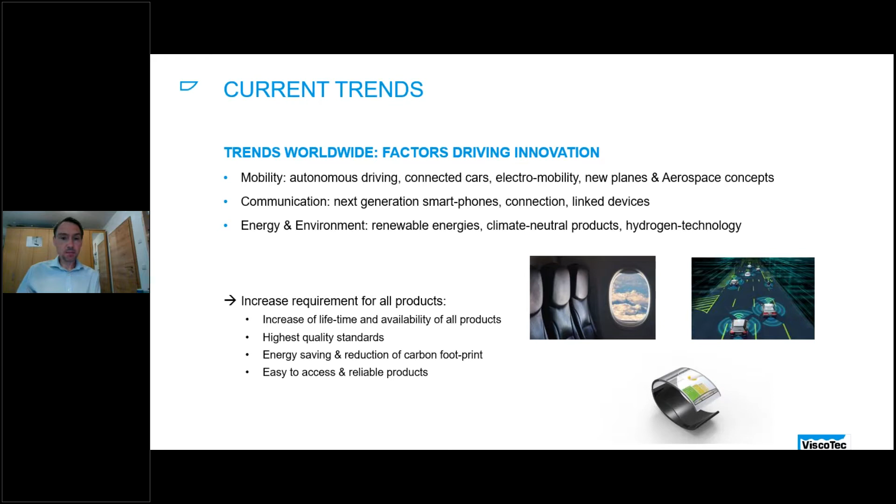What does this mean for manufacturing? There are demanding requirements, and the production processes and raw materials are adapted to these new products, or required products. New materials are used, so the latest R&D developments in case of any raw material or production materials leads to challenging processes and products in manufacturing.

These challenges have to be adapted in your factory or during production. The efficiency has to be increased, as well as the flexibility. Downtimes have to be decreased and the yield has to be increased, as well as the quality and output range. State-of-the-art materials, products and processes have to be introduced.

Looking more in detail at fluid dispensing manufacturing processes, these are tremendously increasing in all production processes. The adhesive bonding process is replacing traditional methods like welding, rivet, or screw connections. Higher flexibility is possible by using adhesives, and also new products are possible by using newly developed materials. Performance, features, quality, product life and reliability are all increasing as well. The dispensing process should be repeatable and very process safe to be a real alternative to the traditional methods like welding or screw connection.

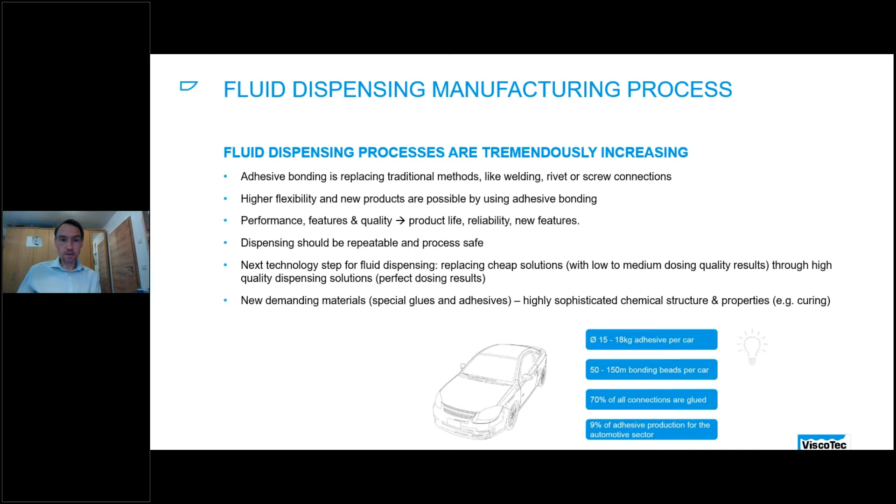This leads to challenges during the dispensing processes as well. Factors influencing the dispensing process include the type of adhesive used, the choice of the correct dispensing system, and very often dispensing systems are also integrated with robots and automation. Of course, the conveying and handling of material is also a very important topic to consider.

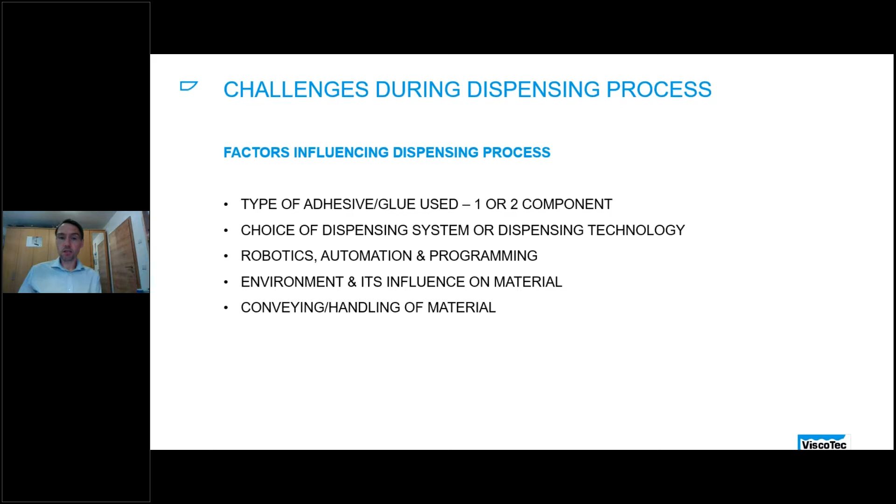What do you need to keep in mind when you deal with adhesives? You have to consider that it's a chemistry, a liquid. So you have to consider the rheology of the liquid, typical features like reaction time and curing time, but also topics like high flammability risks, abrasive particles, and thixotropic behavior. A faulty design or choice of dispensing system often leads to production delays, quality rejections, and increased scrap, waste and losses. Typical errors are that the parameters needed for dispensing are not clearly defined, layout is not taken seriously, and there's wrong consideration of hoses or equipment.

How is an effective dispensing system designed? First of all, it's very important to look at the handling of the material. Are there any requirements for circulation, agitation, degassing, or pre-treatment of the material? The next step is the choice of dispensing technology. There are many different dispensing technologies available, from very simple ones to highly sophisticated ones. You have to consider the required accuracy and precision, as well as other requirements like flow rate, dispensing type, and the pressure situation within the system.

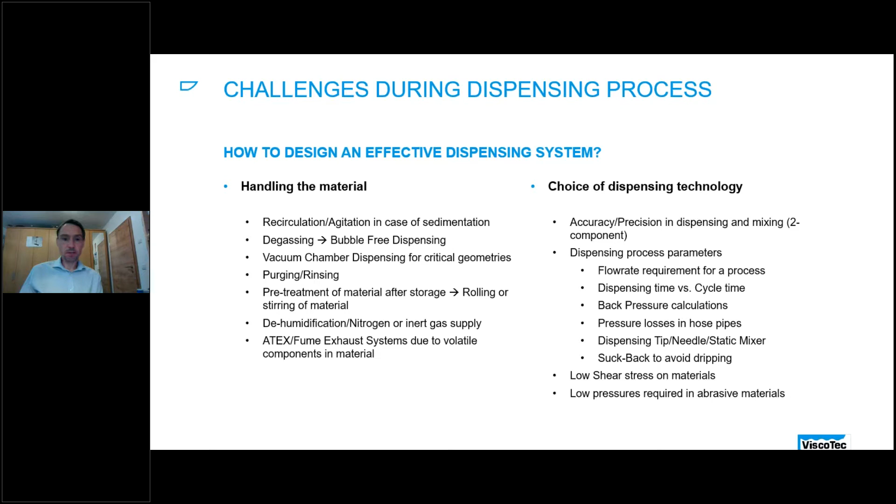There are also challenges with newly developed materials and adhesives. Nowadays, really high viscosity pastes and liquids are available, as well as phase-changing materials. This phase-changing material is a mixture of a liquid and a solid material which changes its phase at a certain temperature. For thermal management applications, highly filled materials are needed or have been developed, but my colleague Johannes will explain more details on these materials later. Combined curing materials are also highly sophisticated, for example with multiple curing methods like UV or heat curing. And of course, chemically aggressive liquids are also included in adhesives, which needs to be considered.

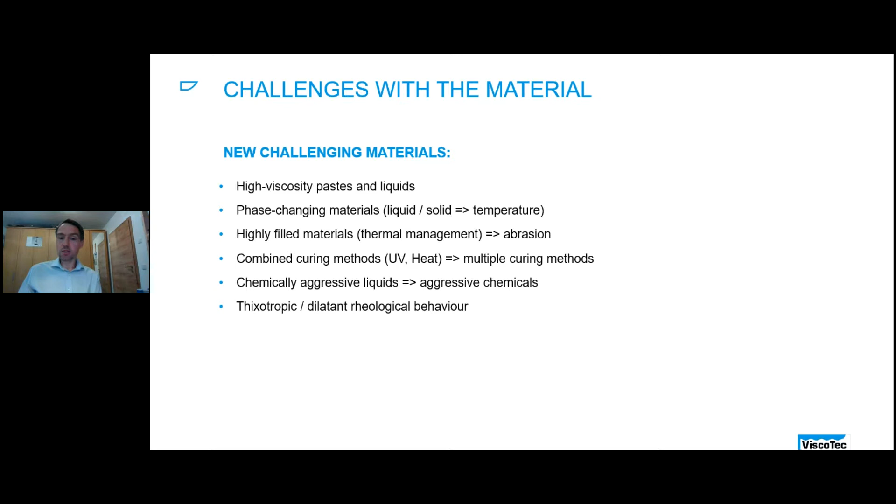Okay, as mentioned, I'll give you a brief introduction of Viscotec, and we start with a video where we can give you some insights into Viscotec.

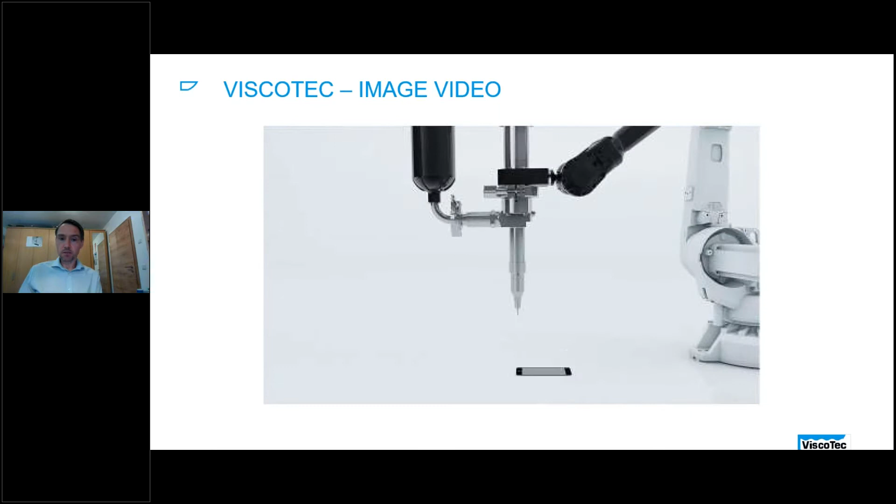As you can see here, we're starting from a satellite. Viscotec develops highly sophisticated solutions for satellites, cars, mobile phones, and all kinds of electronics. You can see here a typical application for electronics display bonding with a typical Viscotec dispenser.

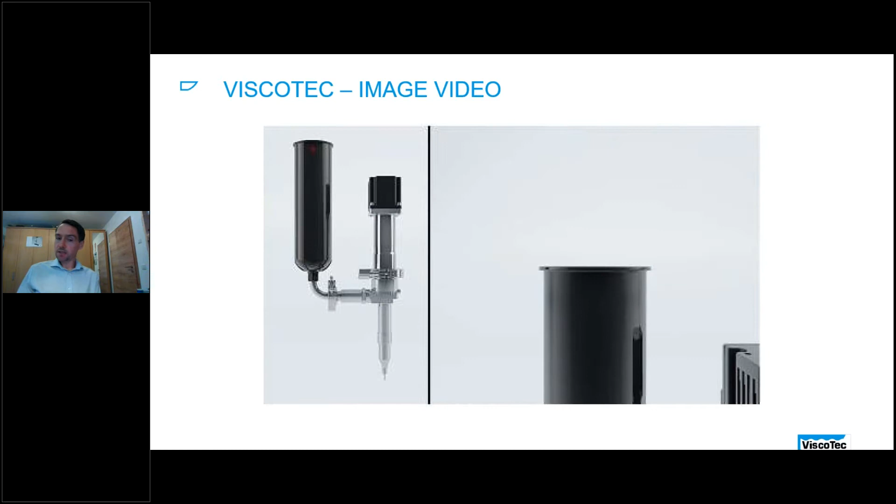This simple dispensing system of Viscotec looks like this. You have a cartridge feeding, a dispenser, and the connection by an electric motor. Gentle handling is guaranteed. The material feeding is done in this case by the cartridge, which will be fed into the dispenser itself.

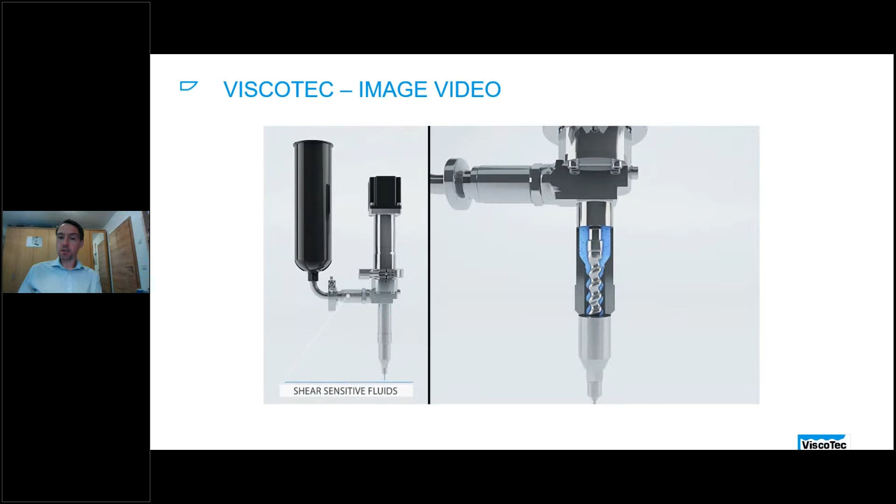So you have a continuous flow rate, and we are using the technology of the endless piston, which means rotor and stator, and this provides the exact dosing amount of the application.

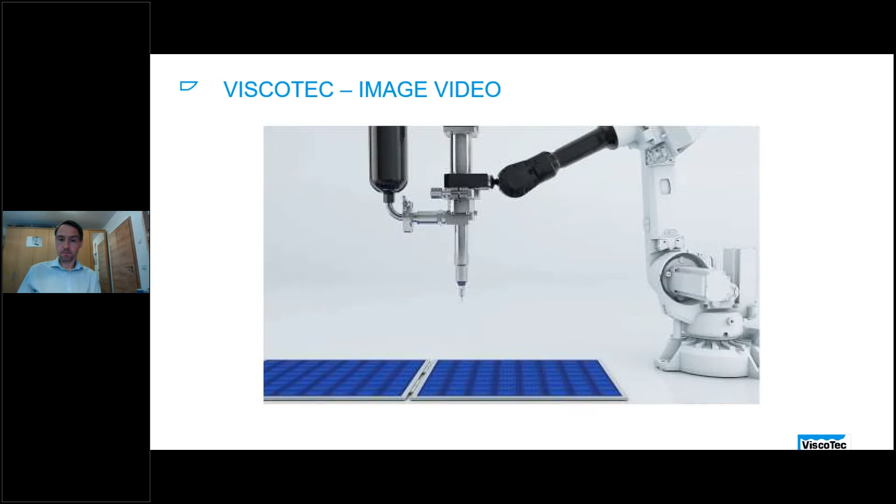Okay, here you can see a typical application mounted on a robot, doing sealing beads on a housing electrical part of automotive. Next example here is for photovoltaic application.

Okay, then I come to Viscotec in general. As mentioned, we are a German-based company with our headquarters close to Munich, so all the production is done in Germany. We have subsidiaries worldwide to provide technical service and sales assistance in India, China, Singapore, France, and the US.

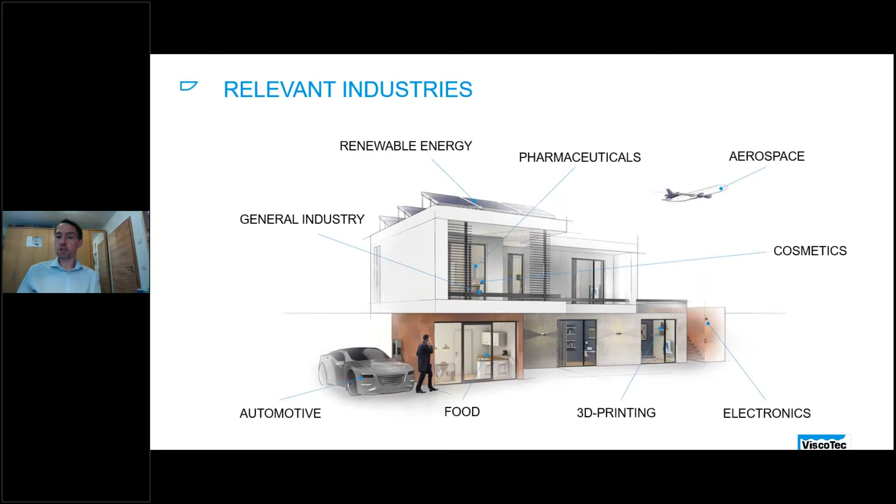When it comes to fluid dispensing, independent of whether it's an adhesive or another liquid, our systems could be used - for example, for renewable energies, pharmaceuticals, aerospace, cosmetics, electronics, 3D printing, food, automotive, or general applications.

As mentioned, we are handling very different materials. In the adhesive sector, we have 1 and 2 component adhesives, UV curing, RTV silicones, epoxy, PUs, silicones - many different types.

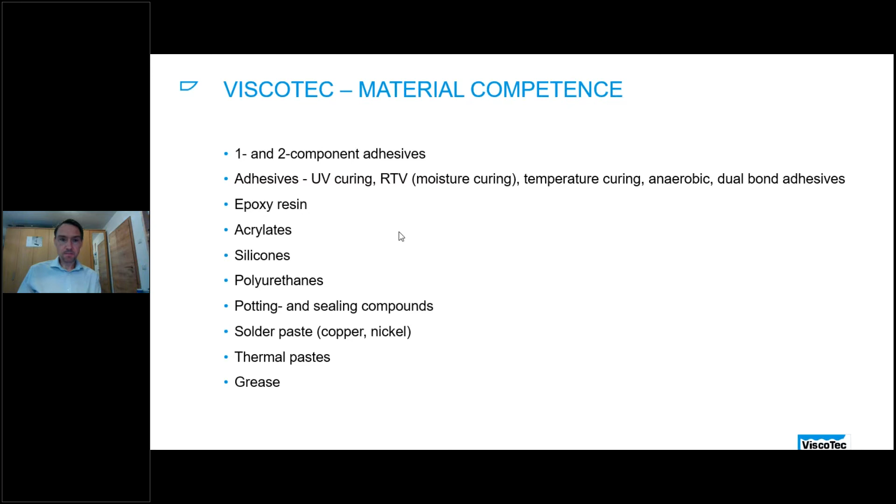What is important here are our brand values. As mentioned, Viscotec stands for precision. Highest precision is really our aspiration and that of our customers. We are providing reliable products, which stands for process reliability. The technology we use is the endless piston technology, and this is the basis for our high quality products. This leads to high quality products, and the quality of our products is reflected in results that impress with their precision. All products I mentioned are made in Germany.

It's driven electrically by a servo motor and is very easy to operate. By controlling the speed of this stator and rotor, you have a defined output, and therefore you can adjust the flow rate as required.

This technology allows pulsation-free dosing, can handle very high viscous liquids up to 7 million CPS, is a valveless technology because this complete system is tight, and offers 99% repeat accuracy.

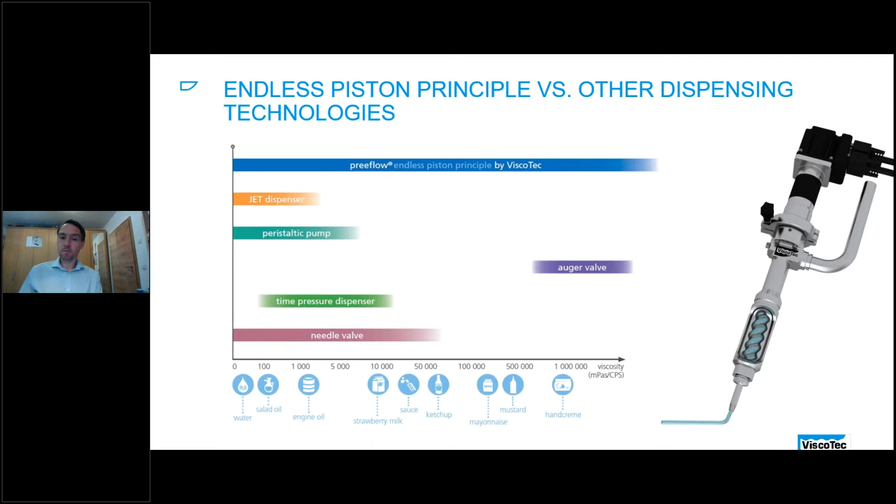Okay, next topic is Viscotec Solutions. We are in general offering modular systems. We have system groups for emptying systems, preparation and treatment, and dosing systems, and we develop these systems according to your specific requirements.

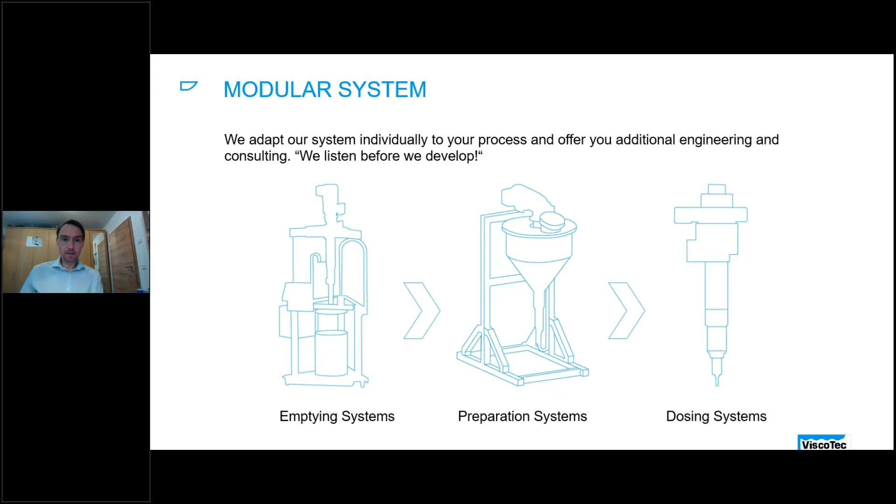The group of emptying systems we can offer starts from small bins, from cartridges, up to very high content barrels up to 1000 liters, or typically the 200 liter pails.

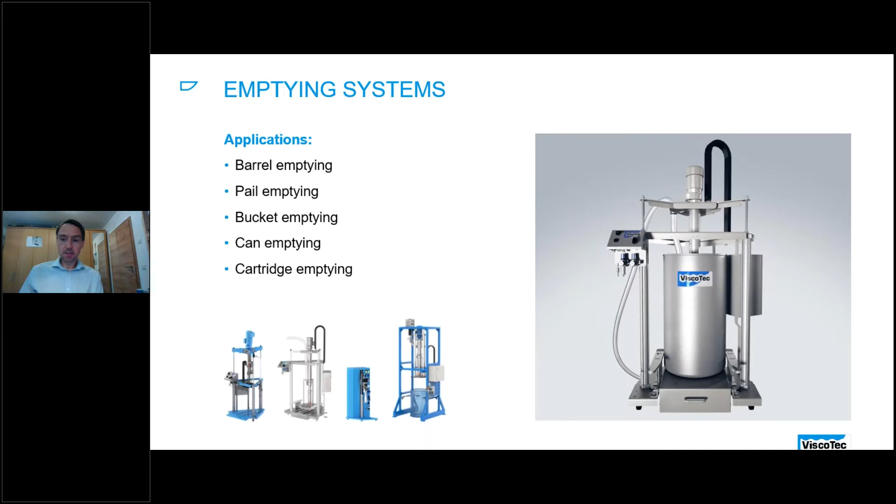And I mentioned we have treatment systems - special systems for materials which need treatment like degassing, circulation, or agitation.

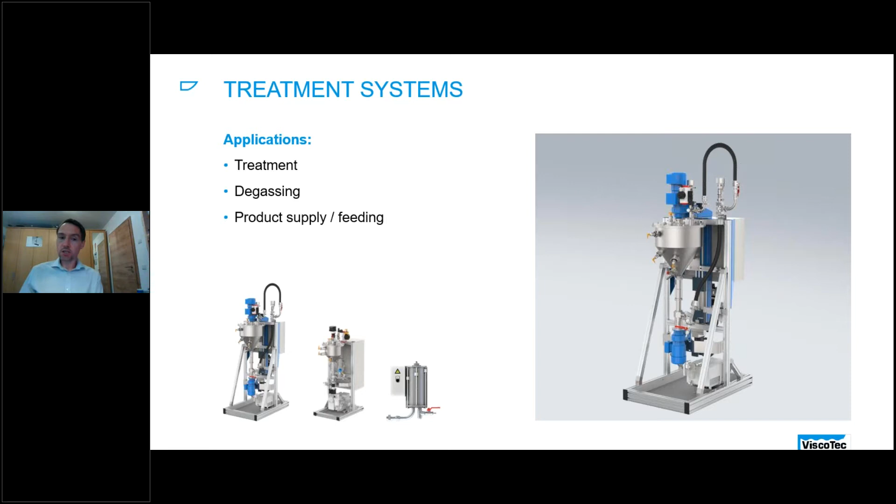This is a typical layout of a 1-component dosing system. On the left, you can see this ViscoMT-XS - it's a pail emptying system for feeding. We have a hose connection, a pressure sensor, and the typical RD dispenser, which uses our endless piston technology.

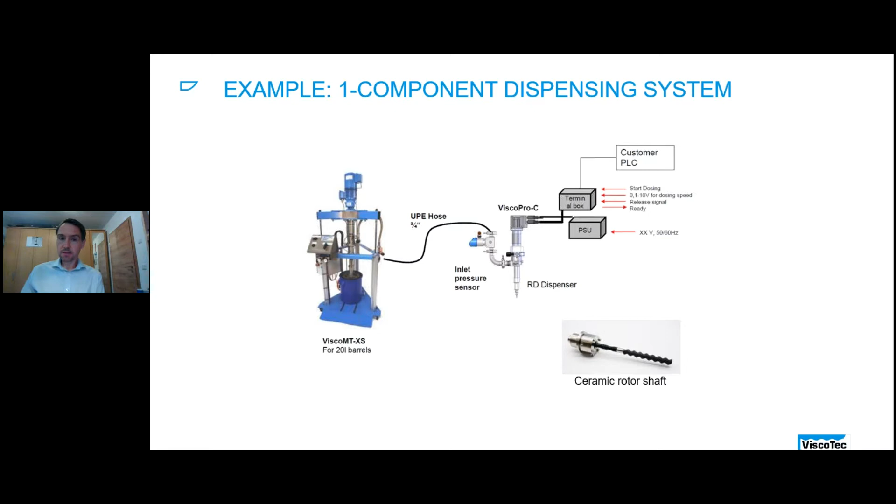The big advantage is that we have the mixed material for these 2-component parts only in the static mixer, which is a consumable. So we have no mixed material in the part, which allows really no cleaning or additional efforts.

Okay, now I present you some challenging applications or solutions we had so far.

In general, when we have liquid dispensing projects and develop a solution for your needs and requirements, we work together with you as the end customer. The end customer defines specific requirements and expects a perfect solution. At the beginning, the material manufacturer of the adhesive also comes into the field because they have all the details with the specific liquids, and they are the specialist on this.

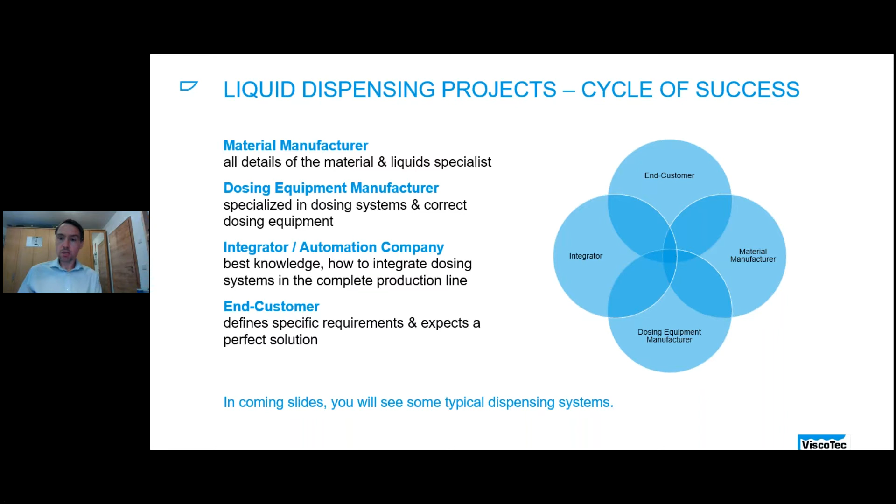The next party is the integrator / automation company. They do the complete integration with robotics, handling, and also integrate the dispensing equipment. The last party is the dosing equipment manufacturer, like ViscoTec. We are the specialists for really the dosing application itself. So at the end, all four parties define and develop the perfect solution for this application.

To give you some examples of difficult projects, this is an example of an air curing dry lubricant. This is a very special material for some throttle valves, as you can see here on top. This lubricant contains solvents and non-mixable particles like graphite.

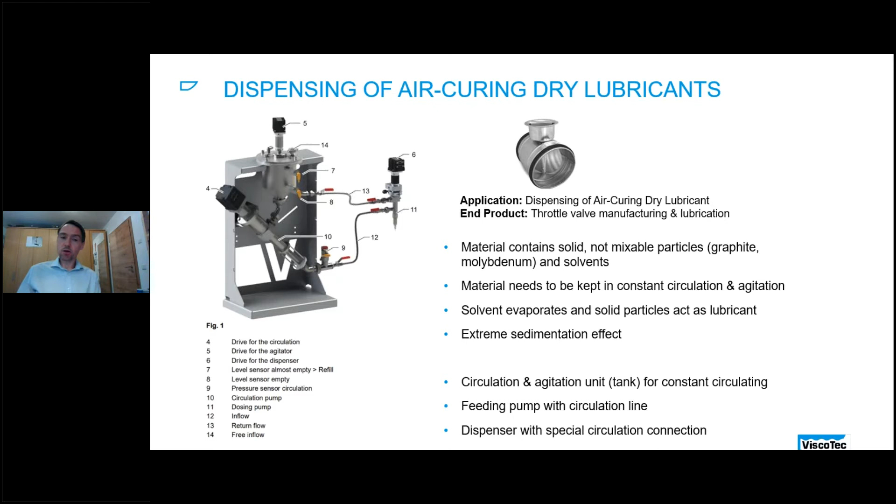It's very difficult to handle this material because it has an extreme sedimentation effect, so we have to keep this material always in a circulation loop to avoid settling and the dispensing being blocked. We considered a special dispenser with circulation, a feeding pump, and a tank where the material is fed at the beginning, and it's always kept in circulation.

Here you can see again the system, and it was a completely customized and engineered solution. Of course, it was necessary to do some tests in advance to confirm the feasibility of the process and materials.

This example of a challenging application was optical bonding. As mentioned, our systems are very often used for display bonding applications. Worldwide, there is an increasing demand for smartphones, computers, and touch screens in general.

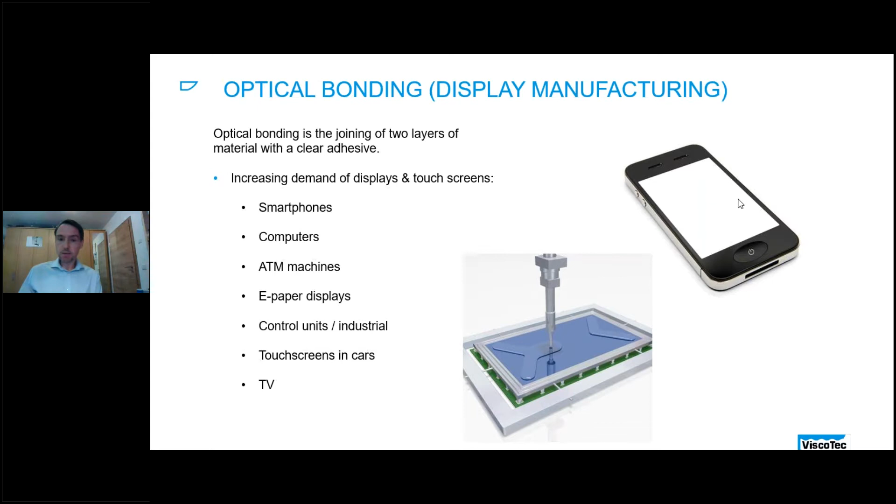To manufacture this display bonding, we typically have two emptying or preparation systems like the degassing. As you can imagine, it's a translucent two-component silicone, so it's very critical to have no air bubbles. All air bubbles have to be removed by our degassing units for component A and B. Of course, highest requirements were needed for accuracy and mixing ratio, and it's a fully automated solution with one of our two-component systems.

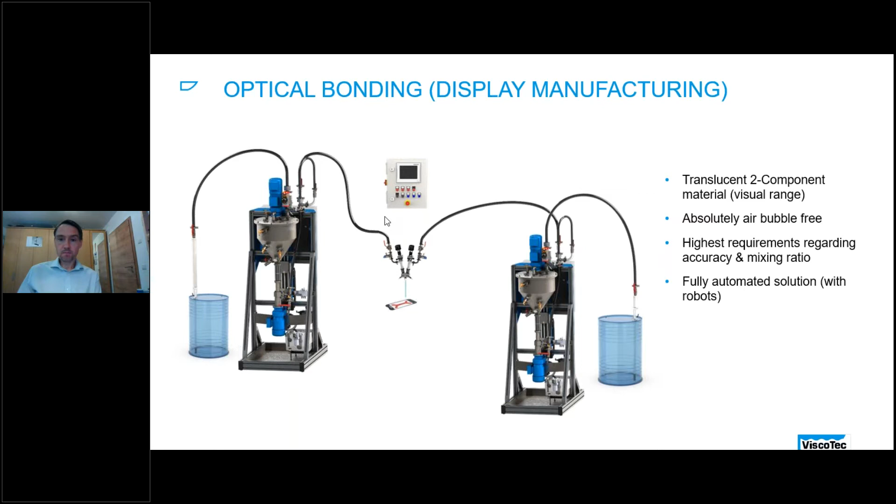This example is again a one-component system, but it was completely heated. As you can see, it's fed by a pail, but then we used heated hoses with a heated pressure sensor and heated dispenser. All this heating is done electrically because we had to handle this heated material.

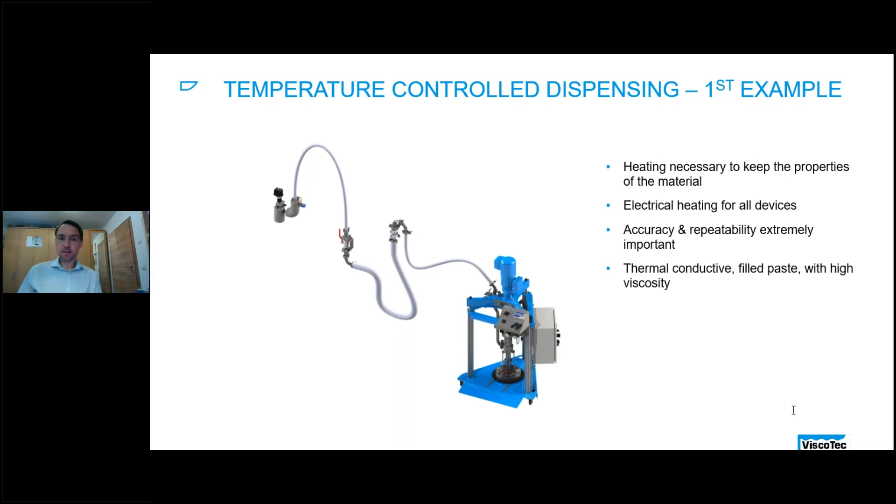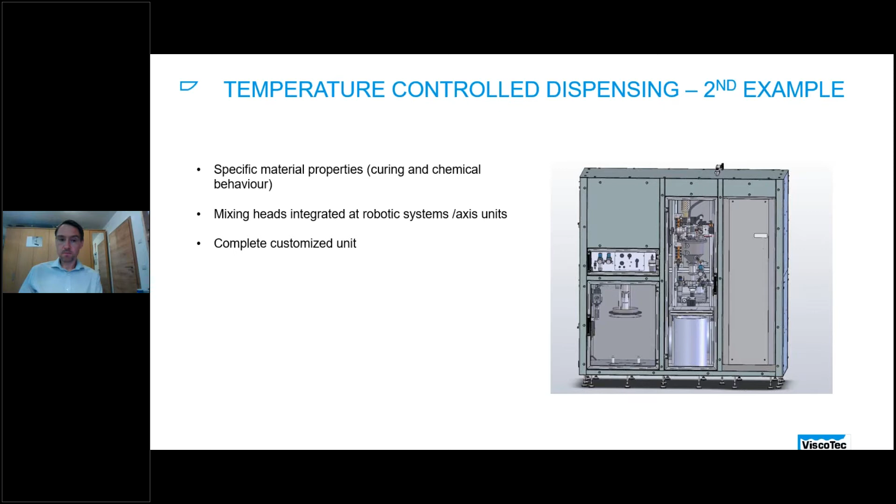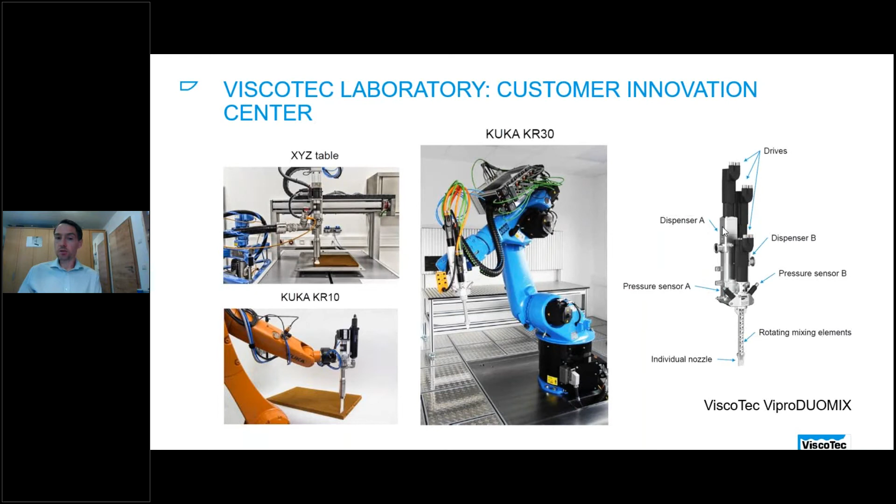This is some Viscotec laboratory footage. I mentioned we do some tests with our systems in the laboratory, normally before each project starts, for new processes together with you as a customer and for new materials.

And here's the Viscotec Customer Innovation Center. It's a new building we have with several laboratories to perform these tests in advance and to define and confirm the feasibility of the application. Now I hand over to my colleague Johannes, who will give you insight into special applications: e-mobility and aerospace.

Thank you very much, Wolfgang, for the nice introduction of the first part of the presentation. Now I would like to continue, as mentioned, with the business development units, e-mobility and aerospace.

Today's focus is on typical dispensing applications with very challenging material properties. Next slide, please.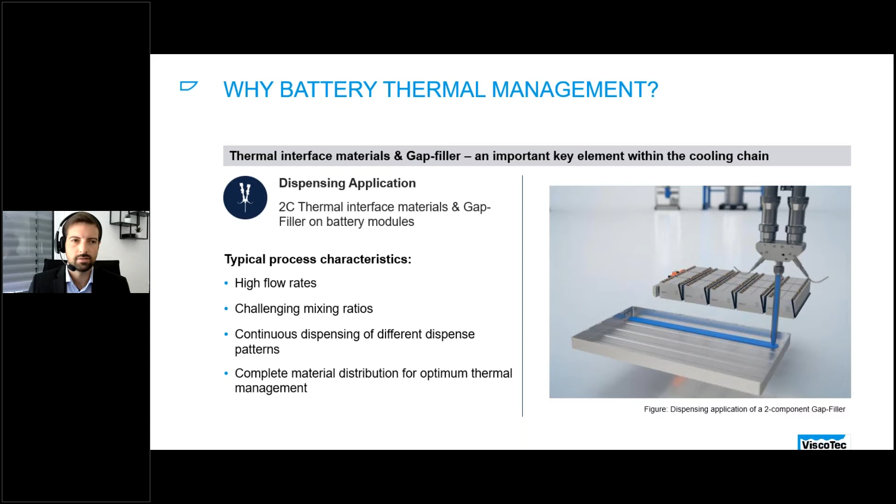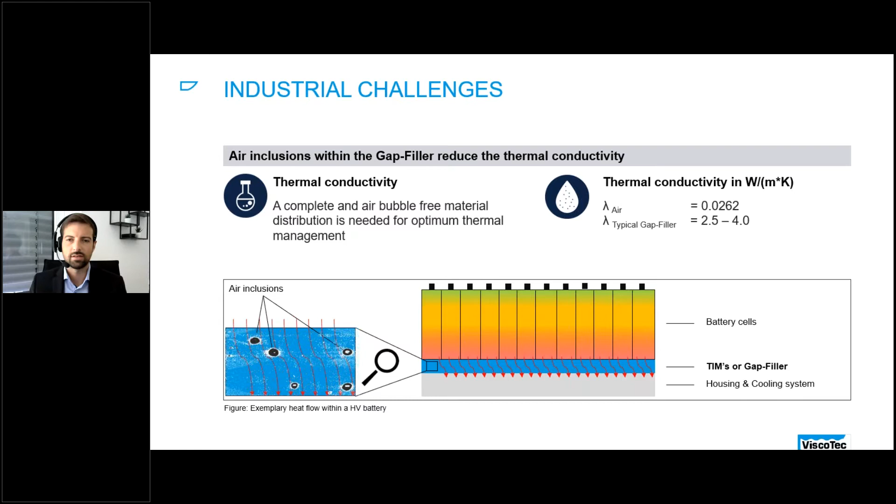The next slide, please. I would like to present our ViscoTec solution for all these challenges and for this application type. Next slide, please. And please start the video.

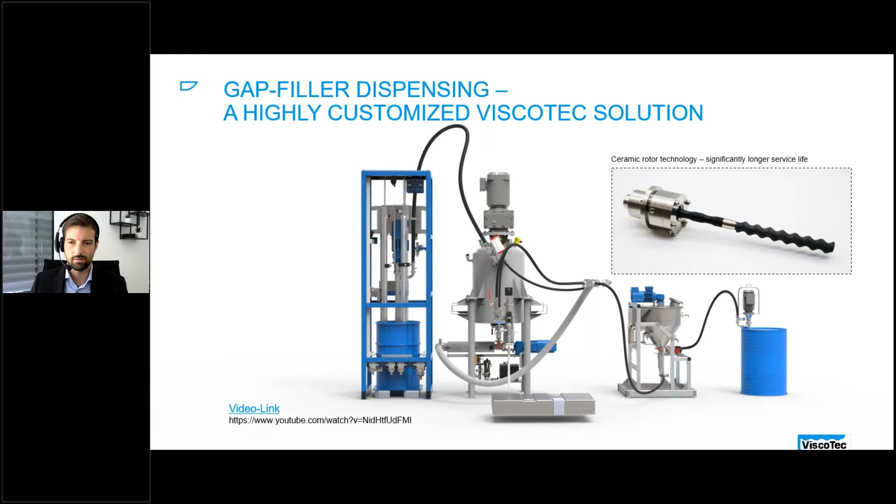So this is a two-component dispensing system for gap filler applications in the e-mobility industry.

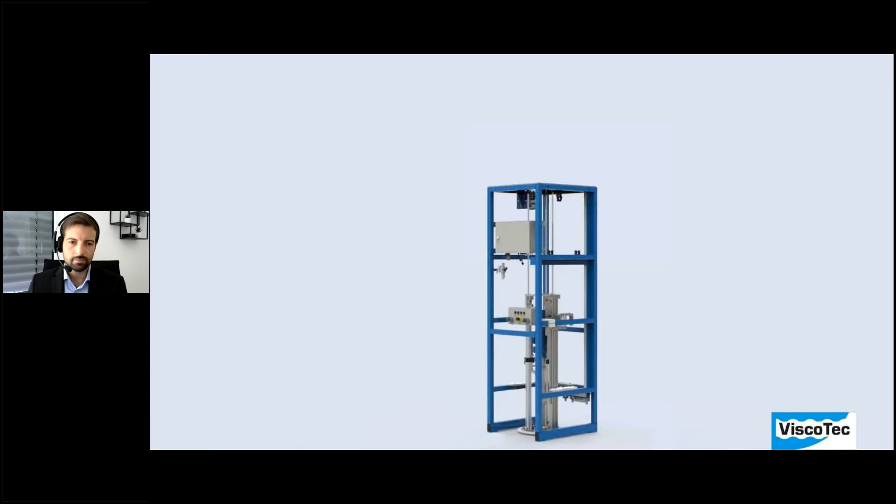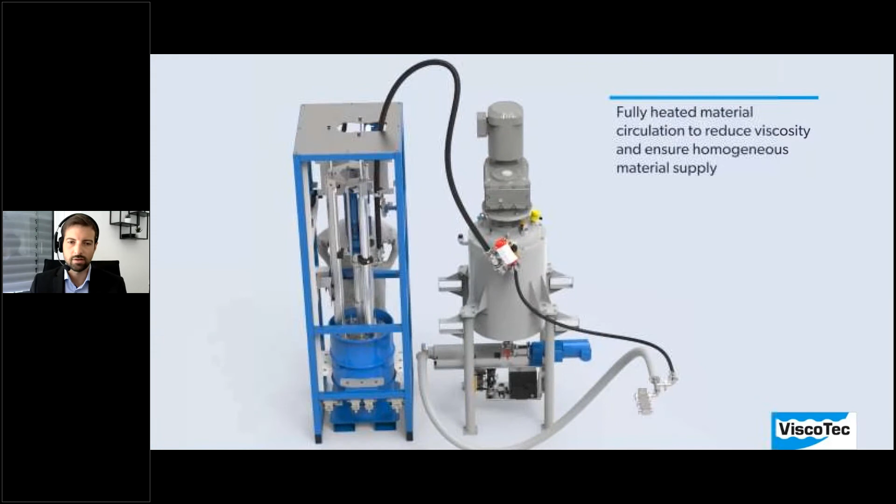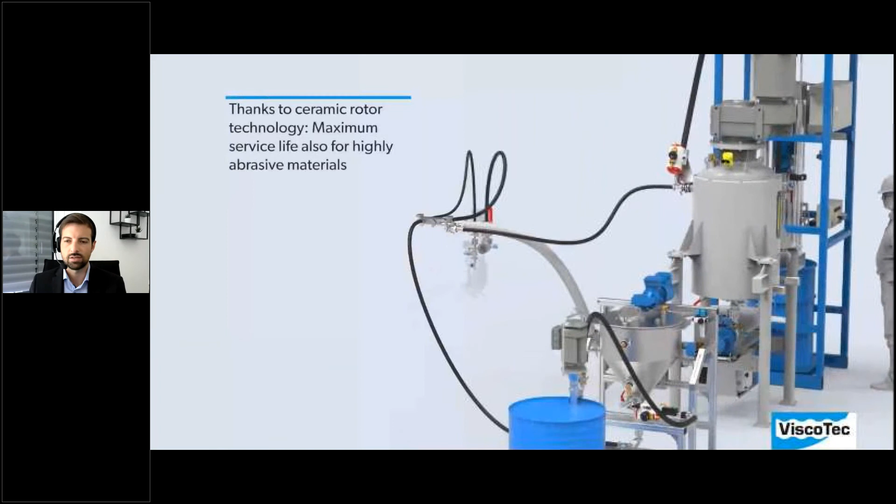Depending on material consumption, typically for the base component a 200-liter barrel emptying system is used, as you can see here. It is connected to a material preparation system and degassing system, including agitators to avoid sedimentation and eliminate air inclusions. Optionally it can be fully heated and circulated to avoid sedimentation within the pipes. On the other side, for the hardener component, we use a barrel pump emptying system connected to a Viscotreat preparation system, to buffer the material and avoid sedimentation for the hardener component as well.

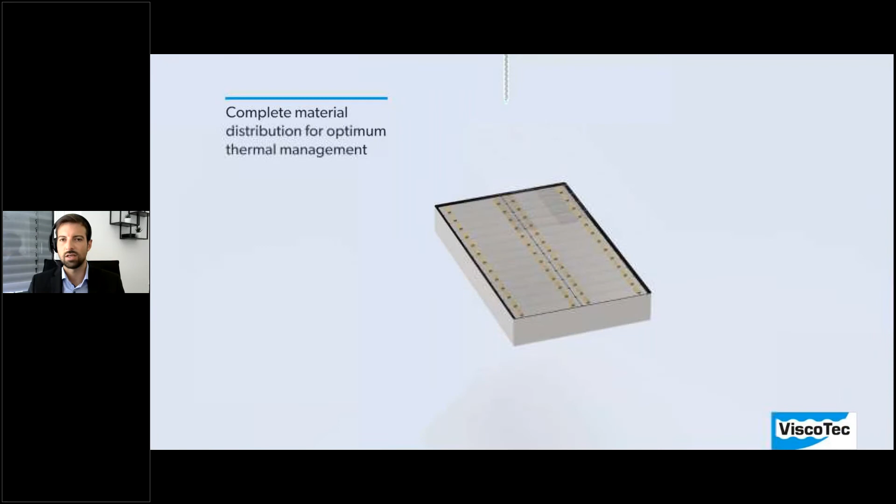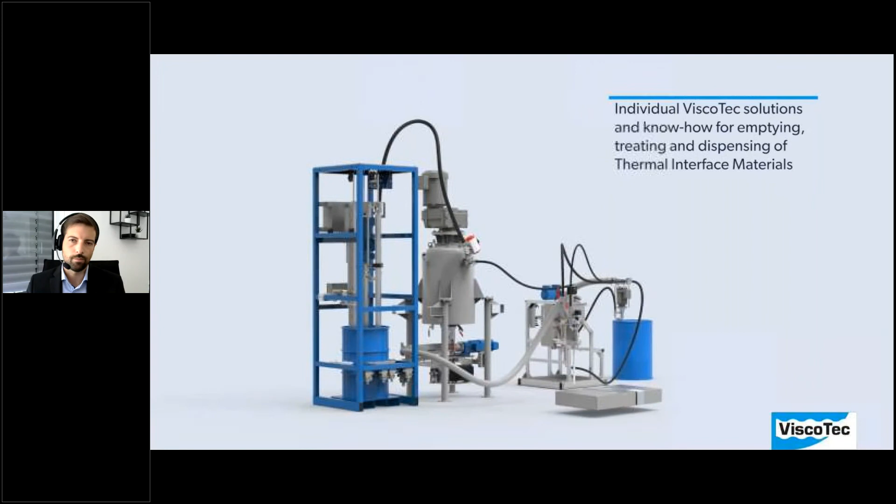Usually both preparation systems are connected to the two-component dispensing system itself. We react to different mixing ratios with different pump sizes, and in this case only component A has to be heated to reduce viscosity and enable better mixing quality. The final result is a complete material distribution under the battery modules to enable perfect thermal conductivity, so a perfect heat dissipation from A to B.

This system is a highly customized solution, but it's also used at different OEMs worldwide. Another feature here is the ceramic rotor technology. As mentioned, these materials are highly abrasive, and compared to our standard rotor, which is stainless steel, we can implement a ceramic rotor to significantly increase the service life of our equipment.

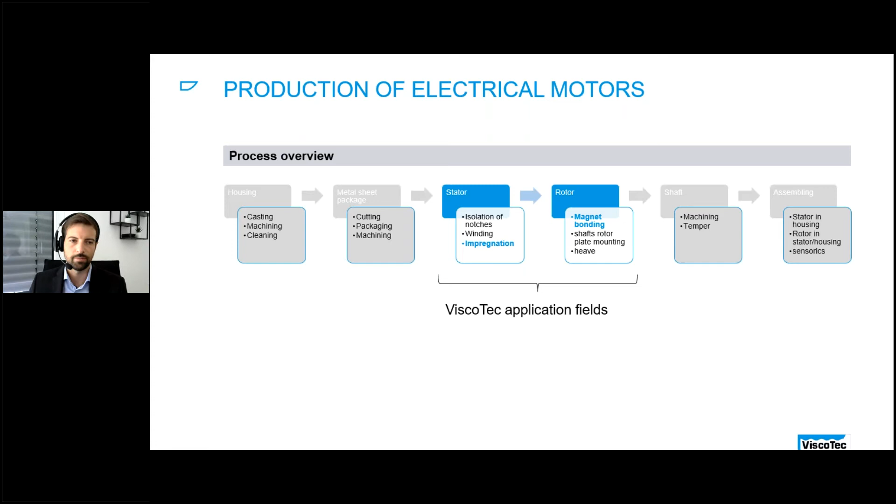So what is resin impregnation and why is it necessarily needed? Electric motors, especially in vehicles, must meet extreme demands—environmental influences and mechanical impacts. They must withstand rough environmental influences like moisture or dust, and mechanical impacts such as shocks and vibrations. Also, in the case of high electrical stress, the motor is exposed to high temperatures. To avoid such failures, the stator or rotor windings are impregnated with resin, and this is also an application for Viscotec.

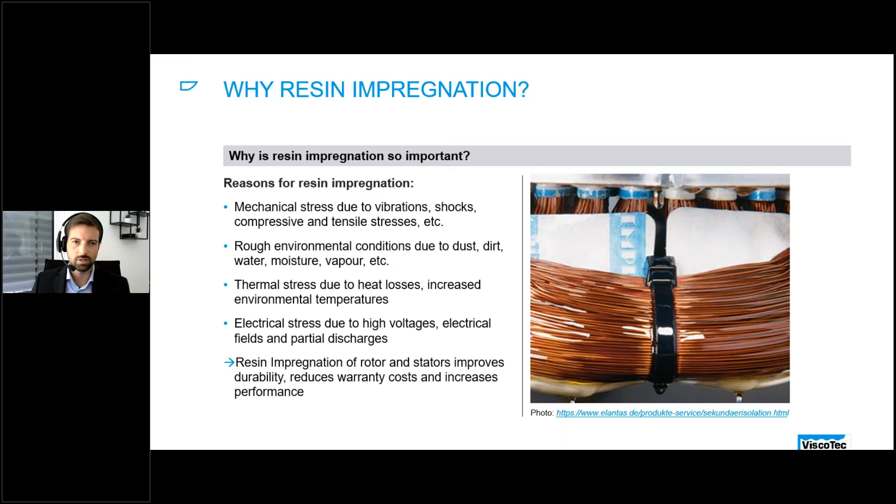What are the industrial challenges for a typical dispensing process? The basic requirement is an accurate and maximum filling of winding slots, as can be seen in the picture on the right-hand side. It is not allowed to introduce any air during dispensing, and safe material handling must be guaranteed, meaning no dripping at the end of the dispensing process.

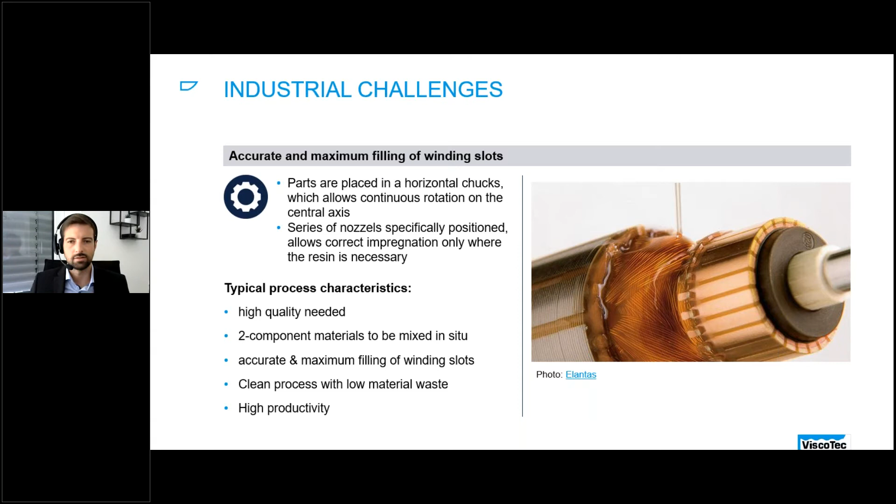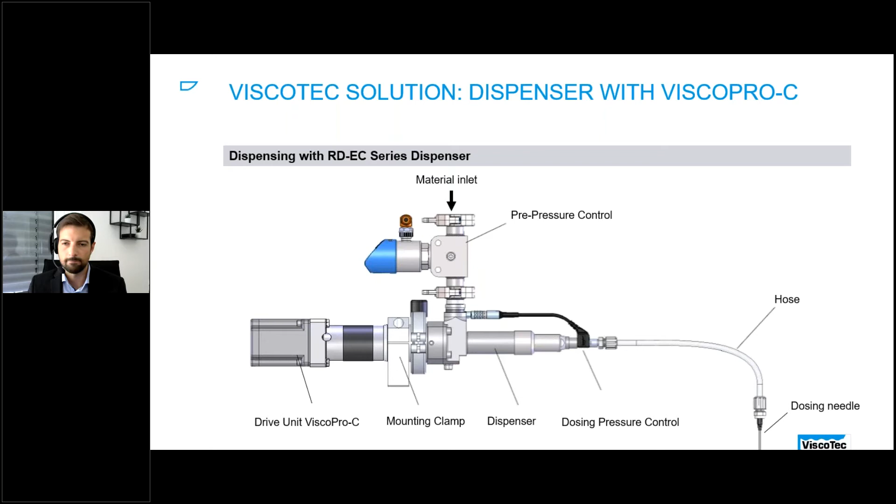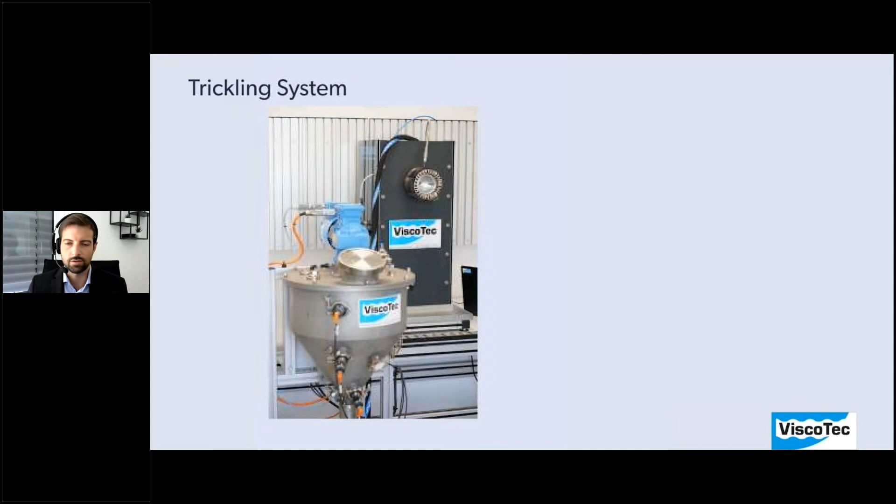This is a test done in our laboratory: resin impregnation of rotor and stator, trickling with Viscotec dispensing systems. This is a typical setup as described before, using a Viscotec buffering and preparation system connected to a one-component dispensing system. You can see the small hose at the end of the dispensing pump, which is connected to the dispensing needle.

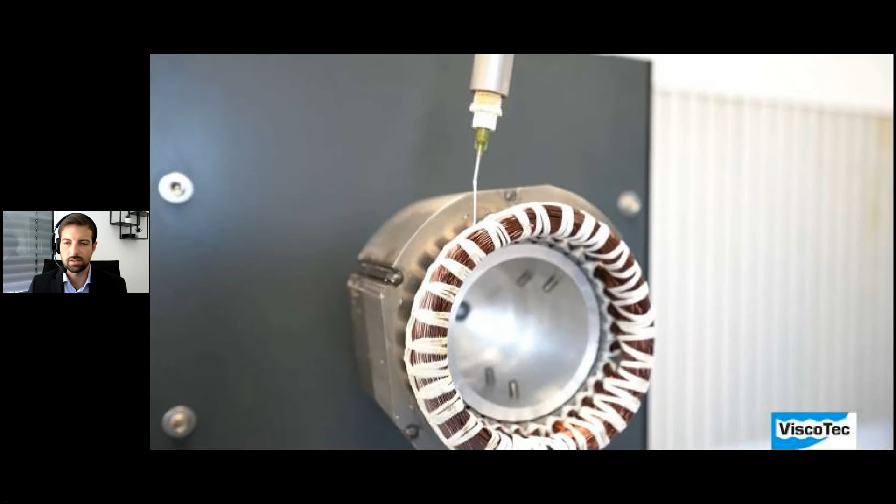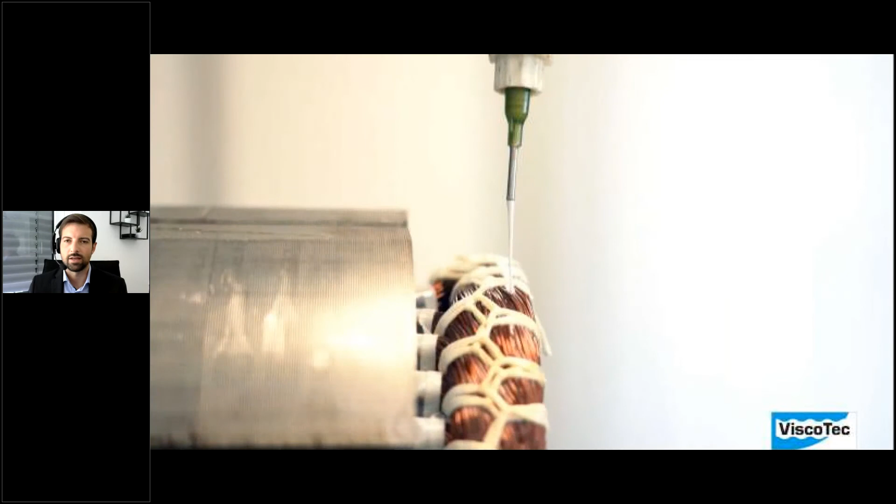The coils are rotating, and depending on the process, sometimes only one needle is needed for a dispensing process, but we can also implement several needles to increase the production rate. This is a one-component dispensing material. The rotation is needed to get a better material distribution, and in case of one-component resins, we can achieve a faster curing time once the system or the coils are heated as well.

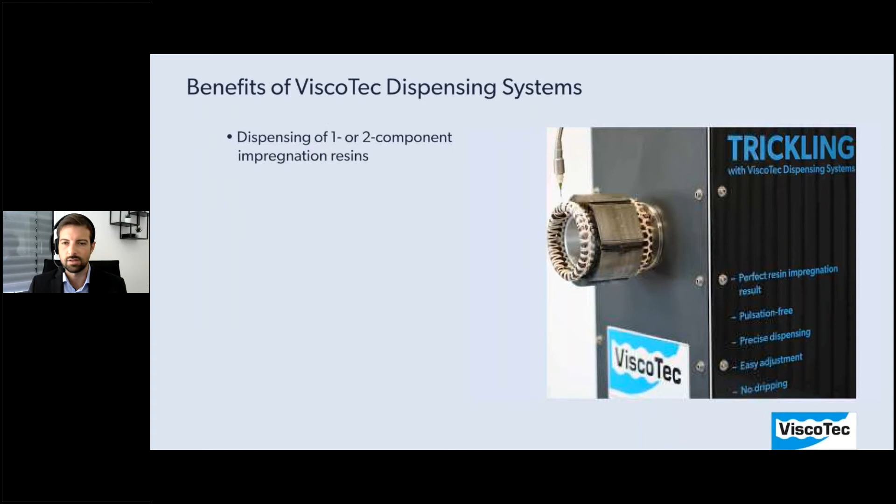These are the typical benefits of ViscoTec dispensing systems: we can use one or two component impregnation resins, that doesn't matter. We can mix two components in situ, and we achieve an air bubble-free dispensing process and a homogeneous material supply. This is based on our technology, the endless piston principle.

Okay, so next slide, please.

Now I would like to continue with business development aerospace. Here you can see a typical overview of our dispensing applications within the aerospace industry. Today's focus is on sealing and honeycomb potting, but we're also present for insert bonding, edge filling, edge sealing, and mix on demand applications, for instance.

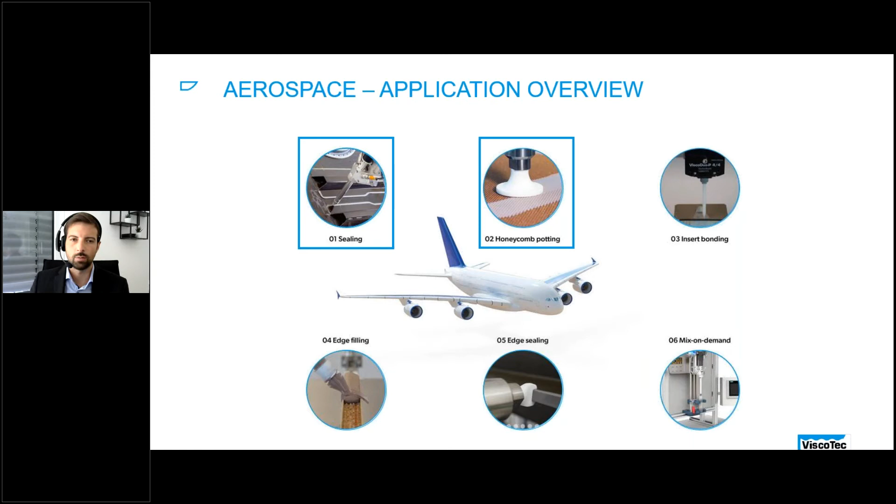But now I would like to continue with sealing. Next slide, please.

Sealing of fuselage structures in aircraft production. It doesn't matter whether side shells, wing shells, fuel tanks, and fuselage structures are made of carbon fiber reinforced plastic, aluminum, or organic sheets; they get connected during production, and therefore sealants are used, for instance, to avoid corrosion.

Typically these sealants are polysulfide sealants, which have been a go-to in the aerospace industry because of their durability and low temperature resistance. You need to imagine once the aircraft is at the airport, there are temperatures like 30 or 40 degrees at the ground, and once it is up in the sky, we have temperatures of minus 40, 50 degrees. So there are huge temperature fluctuations, and we need to ensure safe operations. The polysulfides are perfectly matched, I would say.

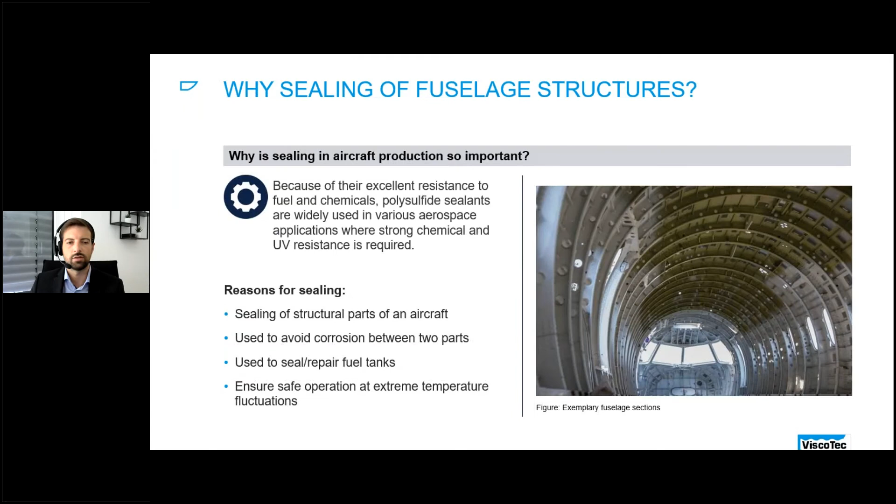There are both one-part moisture cure and two-part catalyst cure types available. Okay, yeah, that's fine. Next slide, please.

Modern formulations are also quite lightweight, allowing them to contribute to overall weight reduction, which is also very important in the aerospace industry. This lightweight property is based on polymeric hollow microspheres, which causes the compressibility of the material, and this is a huge industrial challenge.

Also, the extreme mixing ratios are a challenge. Furthermore, the application itself is quite complex sometimes, so therefore individual nozzle design is needed. Next slide, please.

Now I would like to put a deeper focus on the compressible behavior of such polymeric microspheres, and this is absolutely an industrial challenge. If you have the material in the original condition, in the original container, for instance in the cartridge, we have a certain volume of the material. But once we put pressure on the material, and even our systems are quite low pressure systems, the material gets compressed in the end.

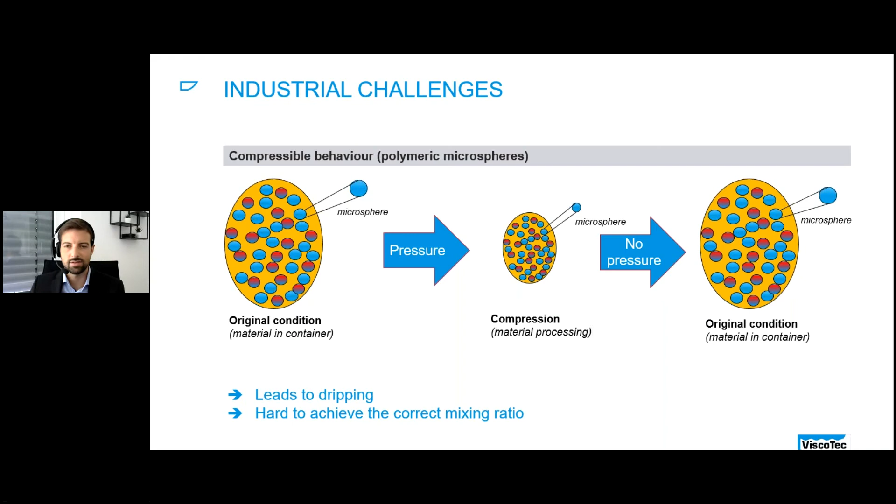So the overall volume is reduced, and once the material exits the outlet of the static mixer, for instance, and it is on the part itself, it starts to relax again, and the volume increases again to its original condition. This definitely leads to dripping in cartridges, for instance, and it's hard to achieve the correct mixing ratio. Based on this industrial challenge, I would like to present our ViscoTec solution. Next slides, please.

Before I introduce the dispensing system itself, I would like to put a focus on static mixing technology and static dynamic mixing technology.

Please start the video on the left side. So we give a stop signal at the dispensing process, but what you can see is the material continues to flow. It doesn't stop, and this is exactly the behavior I described before. The material can't be really controlled.

But with our static dynamic mixing technology, if you start the video on the right-hand side, we are now able to control the dispensing process. So now we give a stop signal to the pumps and to the drives. We wipe it off at the outlet, and as you can see, there's no dripping at all. This is a huge advantage for automated production in the aircraft industry, because now we are able to control the material flow and avoid any material distribution on parts and surfaces where it is not needed.

So next slide, please.

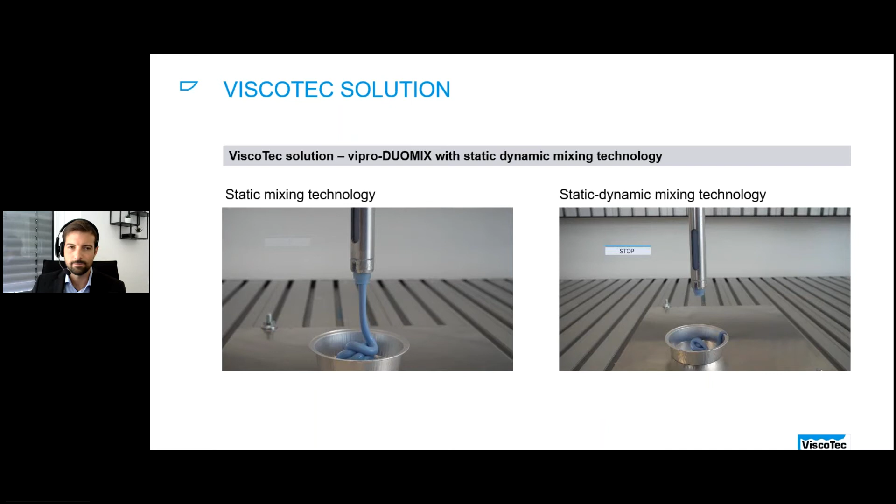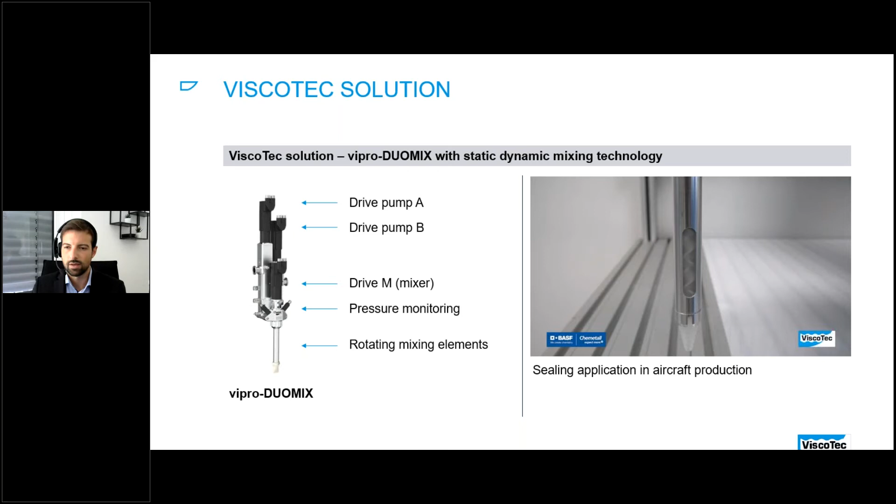So this is the dispensing system as described before. It is called vipro-DUOMIX, our static dynamic mixing technology. Compared to a standard two-component dispensing system, the only difference is a third drive for the mixing elements to enable rotation. Please start the video on the right side.

Here you can get a better impression. You can see the rotating mixing elements, and the material gets conveyed and mixed until the outlet of the static mixer. Now we are able to conduct applications fully automated, compared to many years ago where it was conducted manually by hand.

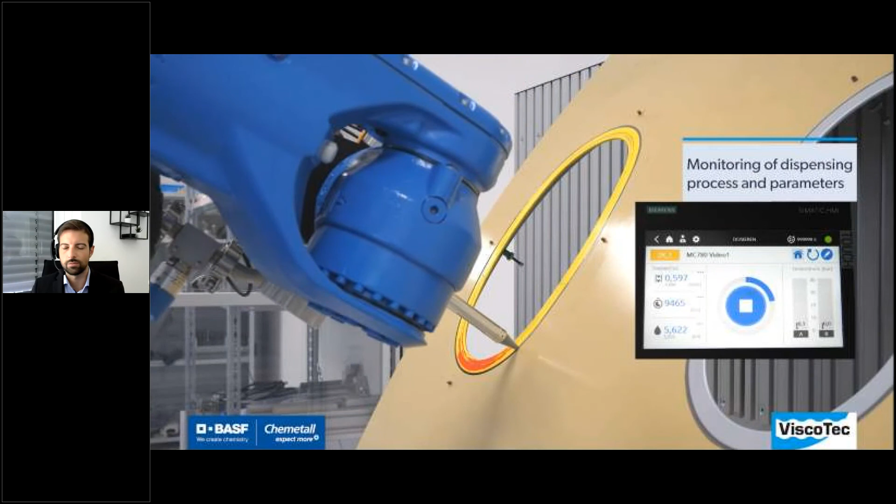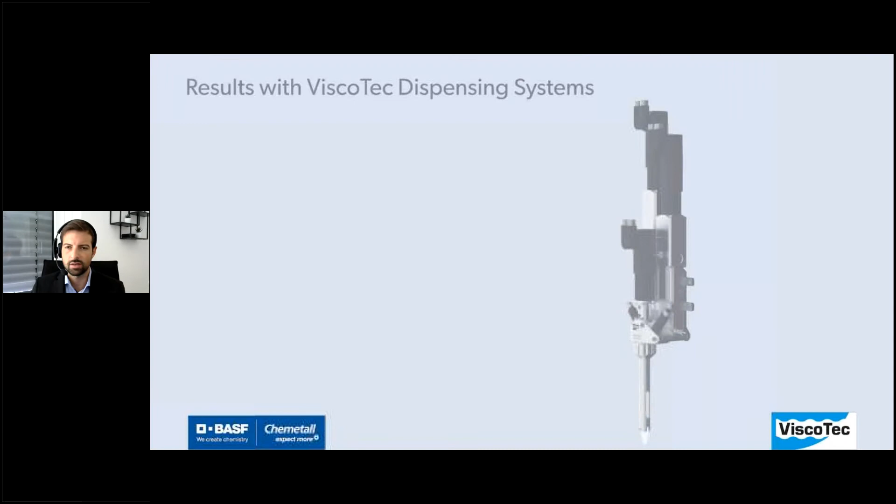Okay, so next slide, please.

So the final application is now honeycomb potting, the filling of hexagonal structures with potting materials in aircraft production. What is honeycomb potting and why is it needed? In order to structurally strengthen or produce stable connection points, honeycombs often need to be filled during the production process. These so-called sandwich structures are used in many areas of an aircraft, for instance in storage compartments, floor panels, or even wings to reduce total weight.

Typical materials are 1- and 2-component epoxy resins, and this leads me to the industrial challenges on the next slide.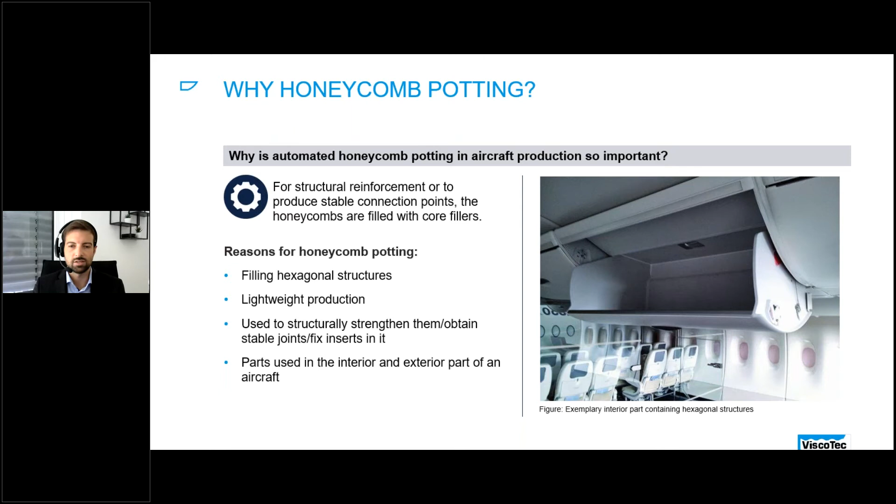So exactly what are the industrial challenges? As said, typical materials are very high viscous, 1 or 2 component epoxy resins. Therefore, viscosities even up to 3 million millipascal seconds are quite common. Furthermore, the materials are usually filled with a high proportion of hollow glass spheres in order to reduce the final density, with usual values between 0.5 grams per cubic centimeter or even up to 0.75.

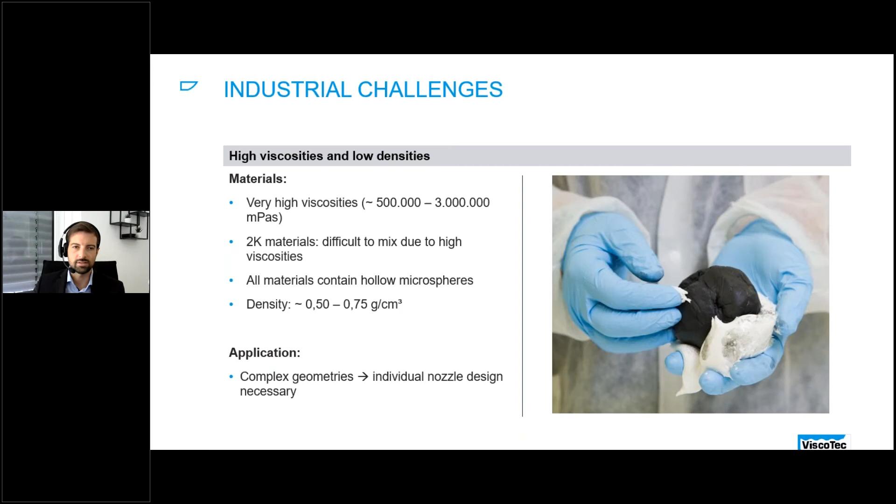So next slide, please. In comparison to sealant applications, here we have glass microspheres, not polymeric microspheres, and this is a huge difference because the glass microspheres are pressure sensitive and can be destroyed by high shear stress. Again, our technology is a perfect match because we have a low pressure system and a low shear system. We don't put much shear stress on the material itself.

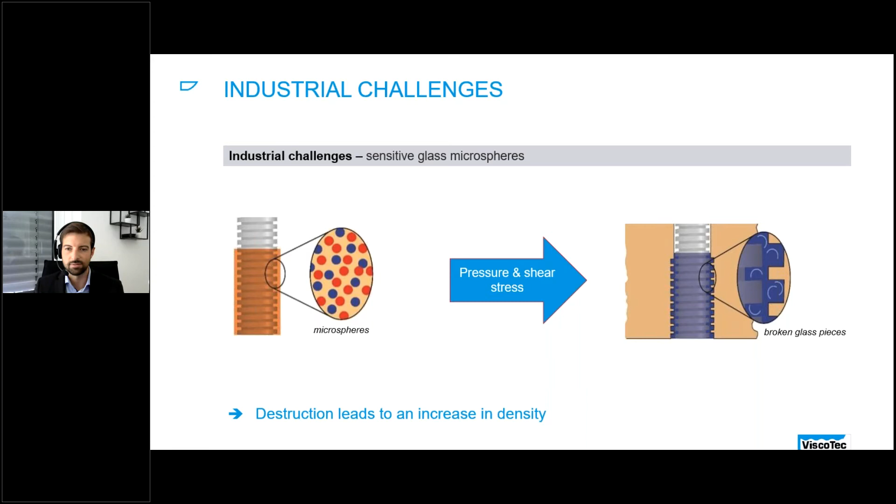So this fact requires extremely gentle handling, as the spheres would otherwise be destroyed, which would result in an increase in density. Okay, next slide, please.

So for the ViscoTec solution, I would like to present an automated system. So, on the next slide, please.

Okay, so currently the process is mainly done by hand. The workers take the material out of the container by hand and press it into the cores with a spatula, for instance. So this process is not very reliable, takes a lot of time, and results in significant material waste. And what about the health and safety of the operators, since they are in direct contact with the materials the whole day?

So with our dispensing system, you can make this process completely automatic, and with different nozzles we achieve different dispensing geometries. You can imagine this is a huge time-saving process and also a cost-saving process, since we're now able to use bulk packs. But let's take a quick look at the dispensing process on the next slide.

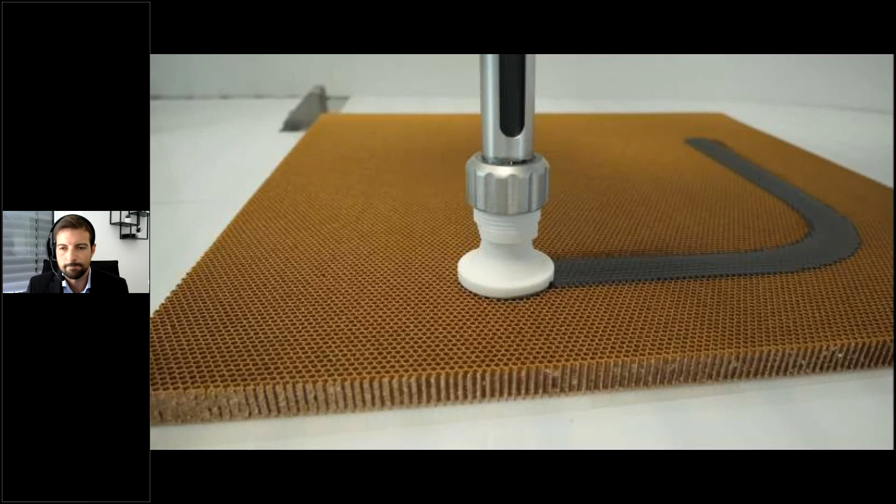So this is a typical honeycomb potting process on the sandwich structure. Can you please start the video to give you a better impression? So this is the dispensing process itself.

As you can see with the individual nozzle design, we achieve a different or individual bead dimension, and the cores are fully filled, which we can see on the next slide.

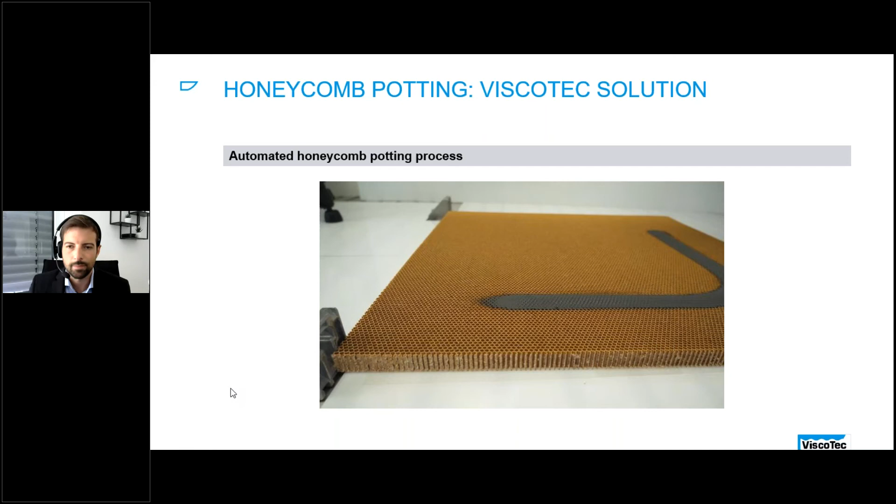So there we have the next slide, please. There we have a view on the inside of the cores and also on the bottom side of the cores. As you can see on the bottom side, it's fully filled, which is a huge advantage. If you look on the inside of the cores, there's no air entrapped at all.

So porosity is a huge issue when it comes to honeycomb potting, but with this automated dispensing process, there are no air entrapments at all. So this is, I would say, also a huge step in automated production in the aircraft industry.

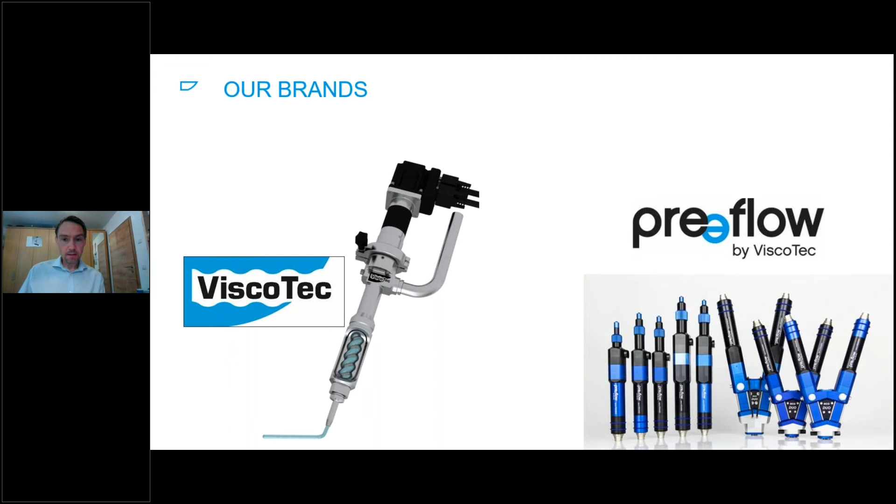With this trailer or video, we will show you what is possible and what will be the main topic for next seminar. Here's again the range for the products, so 1 and 2 component dispenser.

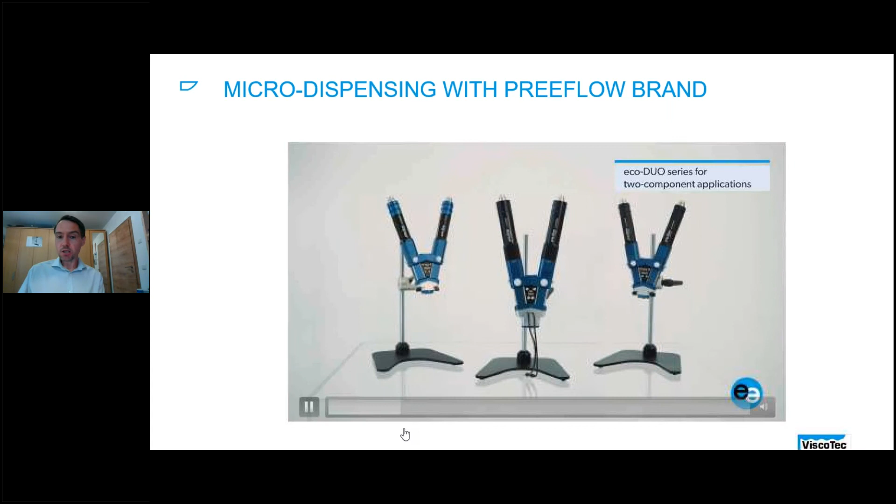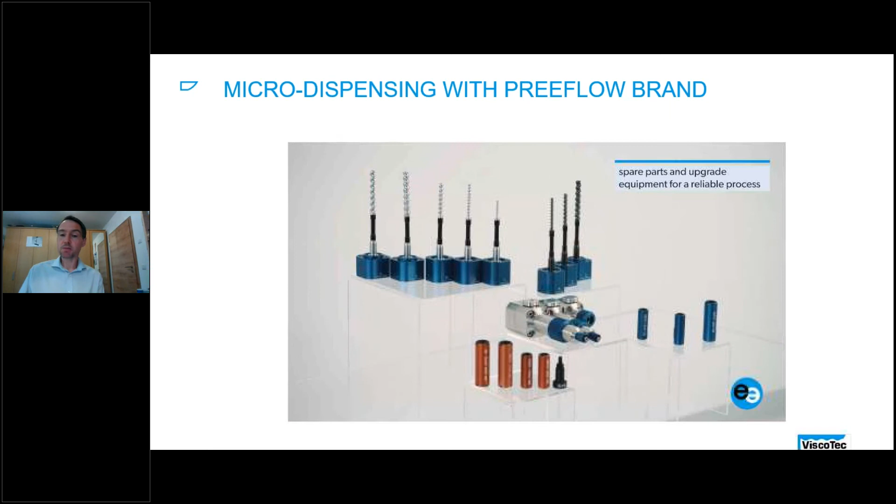Also, static dynamic mixing unit is available, spraying, control units, of course, and also consumables for micro dispensing, spare parts as well. Typically, these products for micro dispensing will be mounted on small robots or axis systems, very easy to integrate and install, and also doing very complex applications like line and dot dispensing for different types of applications. So I mentioned already, also for automotive and electronics application in general.

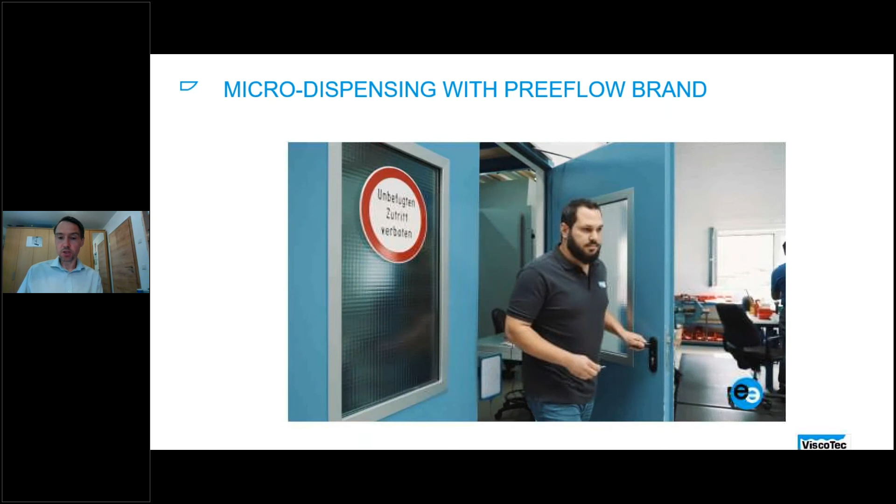Here again, it's our static dynamic mixing head and the two-component mixing using the same endless piston technology from Viscotec. The rotors, the screws, are very small, as you can see here, and everything is produced in-house at Viscotec Germany, including the stators with the rubber parts as well.

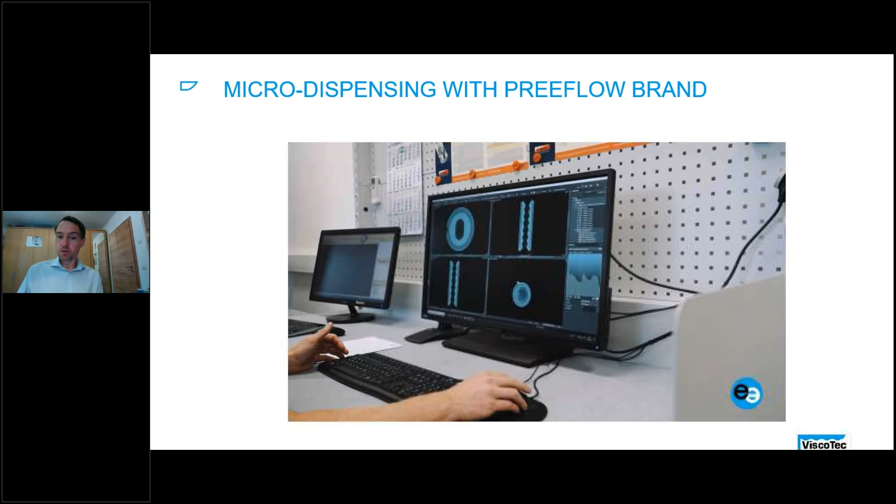Quality inspection and providing the highest quality levels is very important, and we have really very good inspection systems to provide and guarantee the quality of our rotors and stators in general, to have this repeatable and precise dispensing unit. Here you can see the packaging of our micro dispenser, which will be sent, checked, and then sent to our customers.

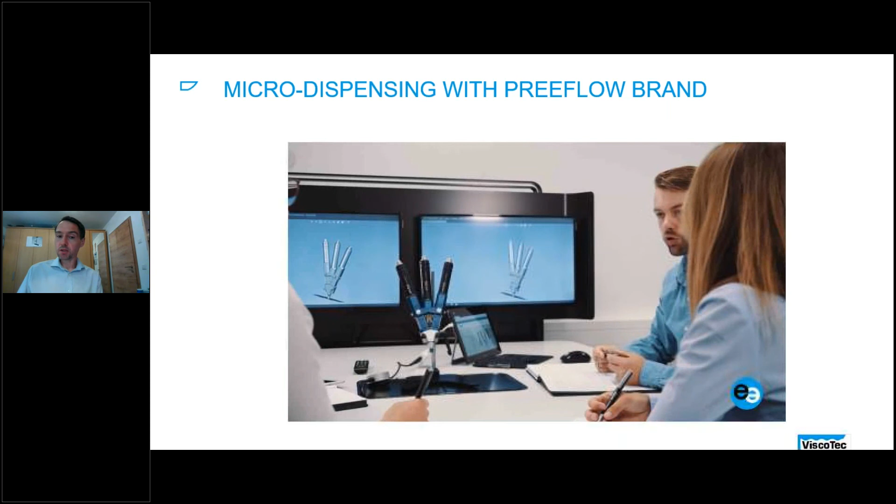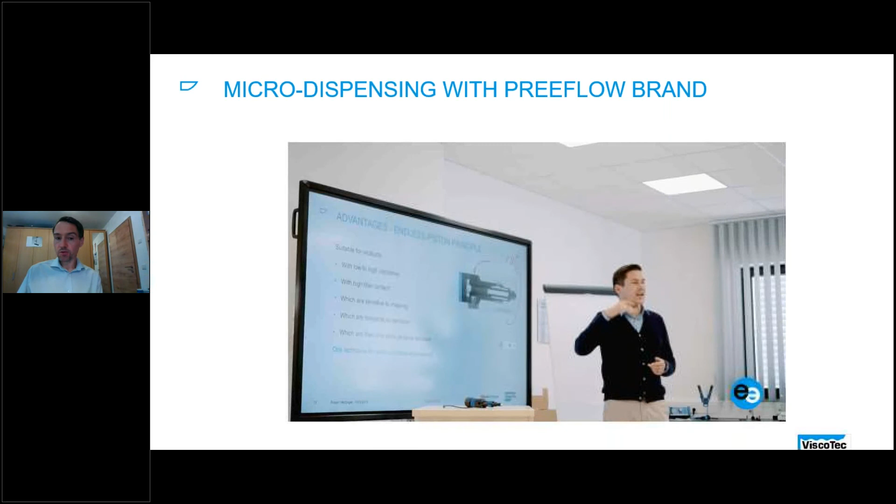R&D work is very important, and as mentioned, we customize and look at each application and provide the best solution for the special requirement and application. Also, technical support by training or supporting our customers is a very important topic for us.

With our global network of subsidiaries and agents, we provide local support, and really we are not far away from your office or factory.